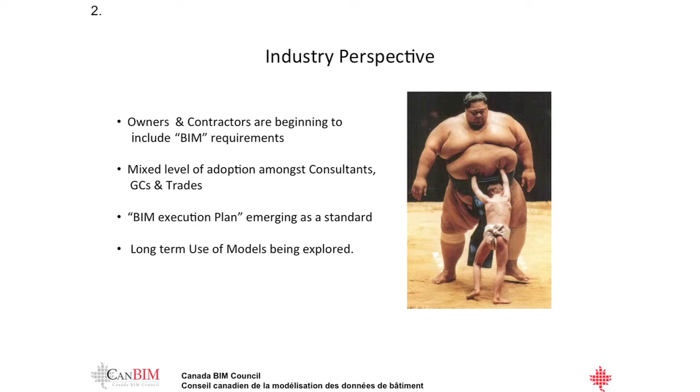We're finding that as our industry adopts it more, owners and contractors are beginning to include BIM requirements. But the reality is there's no cohesive standard around what it is. An owner can put in an RFP, you'll provide a BIM at the end of the project. Well, what is that? What does that mean? And so we're finding that as we go across the country and talking to various individuals and groups, there's starting to be a consistency in what's being asked for in terms of deliverables.

Clearly, the model itself, many will agree, has little to no residual value at the end of the job. It's very hard to integrate it into anything. So it's more around what are the deliverables at the end to allow, for example, facilities management. There's early adoption of COBie standards in the early going, and finding that as we move through, that information is maturing. So a lot of mechanical engineers, architects, and mechanical contractors and owners are gravitating more to that aspect.

BIM requirements, we're trying to help out as well. I know that myself and Bruce McCollum have actually, in Alberta, helped Alberta infrastructure write the right things into their RFPs around BIM deliverables. So that's something that, from an industry perspective, is still needed.

There is clearly mixed level of adoption amongst everybody. Some are using it simply to model. Others are using it to mine the data that's within the model itself. And we're finding as well that many are transitioning, providing the model in some form, whether it's exported out to another building information enabled piece of technology, or it's direct access to the model itself. At the end of the day, we're seeing this very much a tug and pull, push and pull process of BIM adoption.

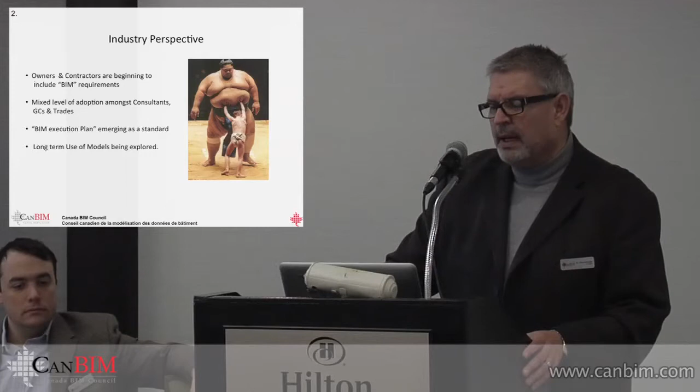Long-term use of models are being explored, but are certainly not maturing. We're not seeing anything right yet where the model has actually gone from its nascent design stage all the way through to a fully useful facilities management plug and play where you don't even need facilities management staff because the BIM is going to do all the ordering for the light parts and everything else.

That's getting there, but it's going along in pieces.

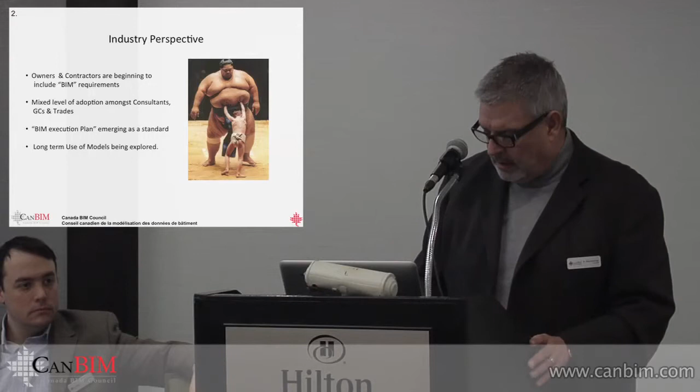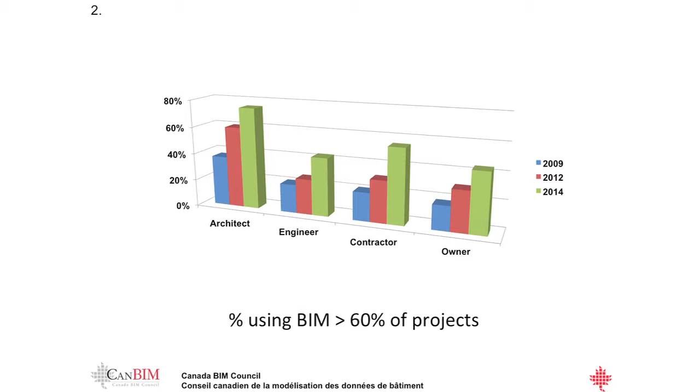We're seeing adoption certainly change now from where it was some years ago. As you can see here in this graph looking at 2009, 12, and 14, the McGraw-Hill review, and this pretty well matches what we're seeing in Canada. Percentage of BIM being used on over 60% of projects in offices, and that's a considerable amount of projects.

You can see how really where the greatest leap has occurred is within the contracting community. That has been a consistent trend where in more recent years, using it has become more and more common. Certainly we see the greatest use still resides within the architectural community, but that is somewhat disparate because it's to what degree is it being used? Is it simply to inform at a 3D level to perhaps a design development and then export out to AutoCAD?

So that is something that is being explored. But certainly we're seeing this trend here, and certainly CanBIM is wanting to ensure that we help each of these groups mature in this way.

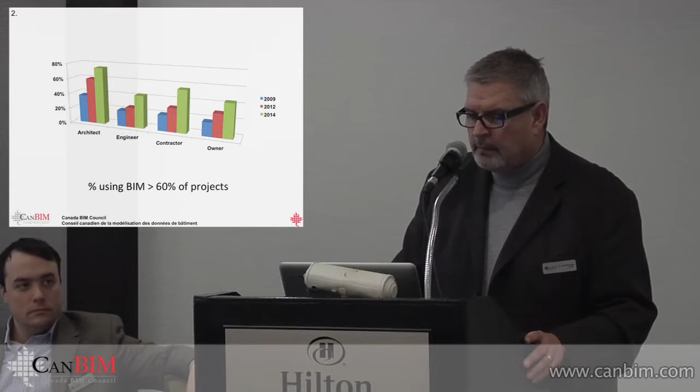So to talk about scope, in terms of emerging best practices, many of you will have seen the LOD 2013 specification that came out in September of last year, where it describes level of development. It's not level of detail. And sometimes the LOD, all these acronyms just get us so confused.

But basically, you can treat LOD, or level of development, as a conversation. What are you going to provide at what level? So there is no such thing, as we're finding with this best practice, as LOD for schematic design. Schematic design can contain information at various levels of development, whether it's 100, an Excel spreadsheet, all the way through to 350, where it's information around joint fabrication.

So those things are certainly coming along, and we're seeing more and more across the country the adoption of that standard as a means to create a conversation with everybody involved.

It is an excellent document to explore. One of the things I know the Designers Committee, in conjunction with some that they've talked with on the General Contractors Committee, is can we develop a joint level of development that could be used? We could append to an RFP, for example, to say, here, when you ask for BIM, here is what's going to be developed, and here's the expectation beyond the design into construction of what the contractor can expect.

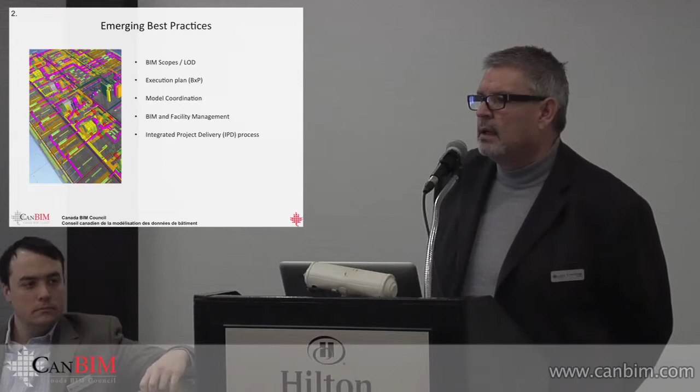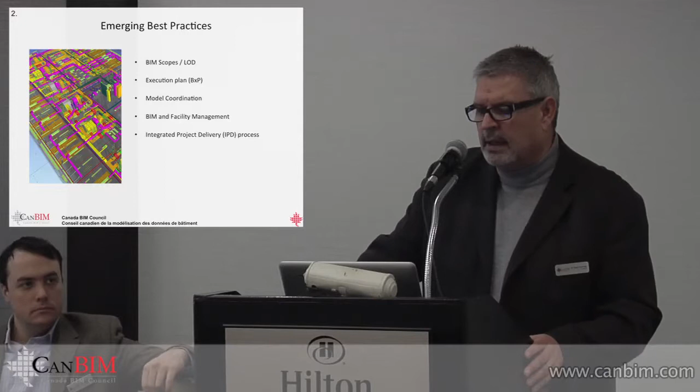I'm aware of 2 in Alberta that are private sector IPD. One that ourselves are involved in, and another group that is a private sector project in the $15 million range. So that's going to be interesting to see how we watch those as an emerging best practice to provide content. Paul Stocko is legal counsel for both of those IPDs. On our way out this morning, Paul and I were talking about providing a best practice, a white paper on what to do if you're doing a private sector IPD.

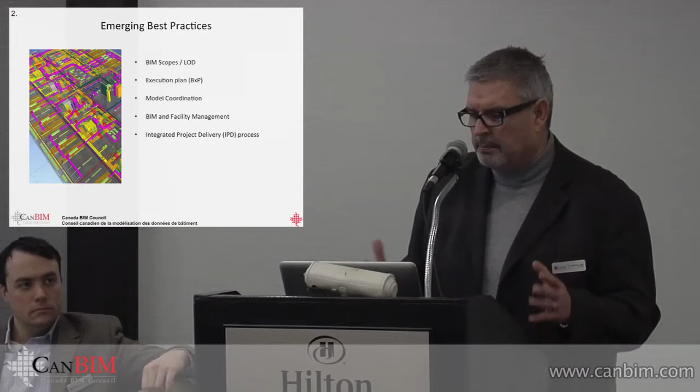So these are emerging best practices that we're looking very closely at. We continue to put a lot of emphasis into the AEC CanBIM protocol. This is a very important document to us, working with our counterparts in the UK, the AEC UK protocol, and a group out of Australia and New Zealand, the ANZRS group. We've been in communication with them as to how this can be developed.

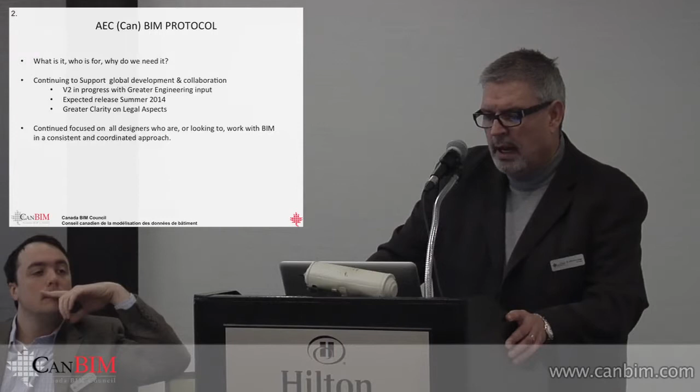And as of December, we connected in with a group out of Building Smart Alliance in the US, as to how we could mature this and perhaps look at it being presented for version 3 of NBIMS on a ballot. So some of the things include greater input from the engineers, a summer release this year, and greater clarity on legal aspects, with a continued focus on all designers looking to work with BIM in a consistent and coordinated approach.

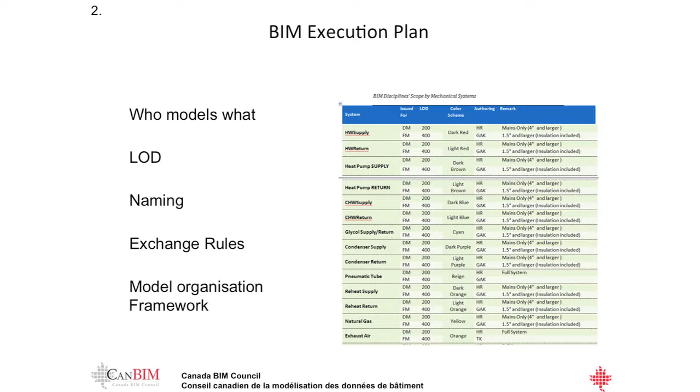As mentioned, BIM execution plans are going to be something to look closely at: who models what, level of development, naming, exchange rules, and model organization framework, such as is it a unified file, is it a federated file? And just to point out, this is a slide that Tom and I know we need to change, because it shows how rapidly this industry is changing.

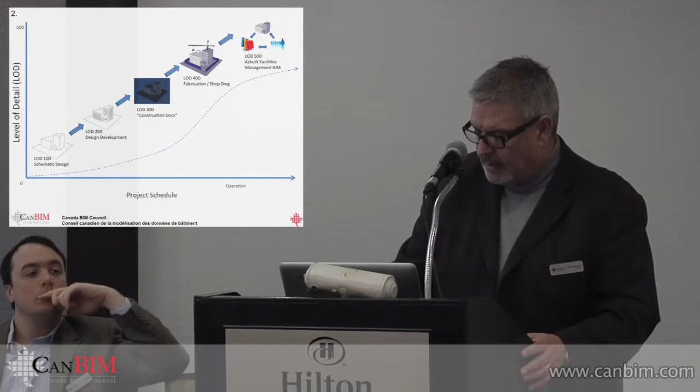Some time ago, level of development was considered around the deliverables we used to think of traditionally - schematic design, design development. Now level of development is evolving around what information is matured to provide to people who can make the right decisions at the right time in a process. So the complete upheaval taking place could have us starting fabrication before we've even finished the complete design. Level of development is now about maturity and what content is needed for that step in time. And integrated project delivery frameworks.

We're hoping that we can certainly share best practices around that. We'll look to the public sector projects going on and gather this in, so that you as new members can rely on this information as a pan-Canadian approach, not something lifted out of the pages of AIA. As everybody knows, it's a different world legally in the US than it is in Canada, so again we're making sure these mature to our level. And I think this still describes the process we see as best as it is at this time.

No longer, from a best practices point of view, can we think solely of ourselves as architects, engineers, and contractors. As designers, we are interwoven with all aspects of procurement, assembly, and operation. Decisions we're beginning to make around building information-enabled projects do inform the process downstream. We can no longer think in isolation or as silos. We have to think of design decisions as impacting all other aspects - assembly and construction impacting design, procurement, and operation. That's something BIM is really bringing to light for us.

In terms of model coordination, we're finding that more and more are using very simple tools. Yes, some are even using 2D content or very simply modeled 3D content to describe things. You don't need to have the ductwork with the rivets and the insulation and the hangers all neatly detailed. What you need to do is describe it at the level of development required to inform the process. But then we want to get to the site.

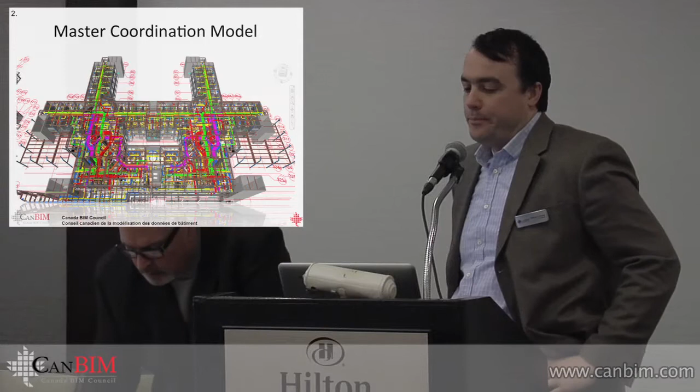Yeah, so I'm going to do a little overview of some of the technologies we're seeing emerging from our perspective. Like Allan mentioned, one of the key things we're doing as a company, and that we're seeing most general contractors in Canada do, is manage all the 3D information that flows on the project and maintain a master coordination model on the job site.

So similar to doing document control, now we're receiving 3D models as submissions. We're receiving 3D models from consultants that represent the design intent, and we're integrating those models together on a regular basis, then managing that process. As we receive the information, we bring it together, we integrate it, we review it, we look for issues, we manage those issues, and we push those issues back upstream to the detailers to resolve, and then they resubmit their work and we integrate it again.

Over the course of the project, we're managing this coordination model. It's made available on the job site to all the tradesmen and everyone involved with the project as a single source of, and the best source of, information on the project. Often we're getting to an extremely high level of detail 8 months before we're even at the point where we're constructing anything. This enables prefabrication, better decision making, and allows us to control cost. So there's big advantages, and we see this as one of the big trends on the job site.

One of the technologies we're using for this model was a Navisworks file. But there are many different modeling systems designed for integration, bringing all these different file formats and systems that the consultants and subtrades work in into the same model, so we can achieve that value.

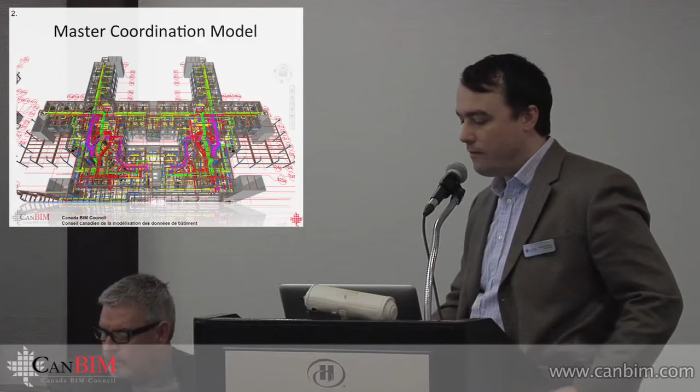The other trend we're seeing is clients, like Allan mentioned earlier, requesting or specifying a BIM model as a deliverable at the end of the project. We've seen this in RFPs as simple as a single line requirement saying provide a BIM model at the end of the project that is as-built and linked to all data. And then we also see 16-page documents that are very specific about the level of detail, the quality of that model, what's in it, and what the formats are.

So we're often responding to that, and this is one of the areas we think is still maturing - the software designed to use these models for facilities management, linking out and exporting data into Maximo and the CMMS systems out there. It's all sort of emerging, but it's emerging very quickly, and clients definitely want it.

We see probably a 5 to 10 year trend where it's going to be commonplace to have a common specification that says you're going to provide a model at the end of the project that we can plug and play into our facilities management system, with a common spec for that. So one of the things the council sees on the horizon is the need to develop that specification with all the other associations in Canada.

Allan, were you going to talk to this?

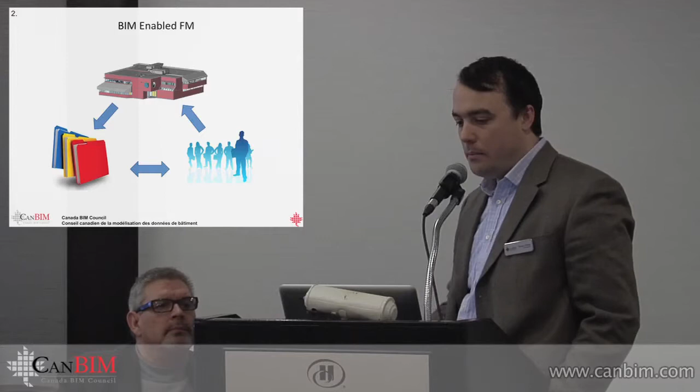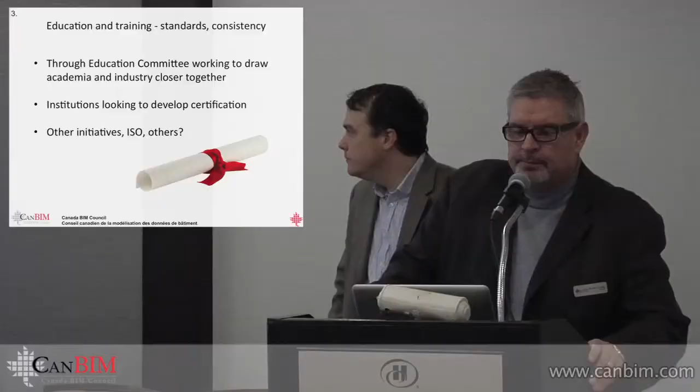In terms of education and training and consistent standards, we're doing a lot through our education committee, and Pietro's here from George Brown. We're looking to broaden this out, but I'd like to ask Pietro if he could give us a Coles Notes update on some of the initiatives he's looking at from CanBIM's perspective to draw academia and industry together across Canada.

Thank you, Allan. The main thing we're looking at is we've found that across Canada, every institution is teaching BIM. But when you go in depth, you see they might just be teaching a Revit course or something very limited in nature when you think about the process of BIM.

So our main intention, after doing an environmental survey, is to establish accreditation through CanBIM. Our main goal is not so much to go out and evaluate the countless courses that seem to exist, but to set a standard of outcomes and objectives, and have institutions come to us and say, this is what we're offering. If it meets our established outcomes, we will begin to issue accreditation on various levels, from a very basic level to a full, perhaps level 3 or 4.

We're in the process of finalizing those levels - something will be forthcoming shortly. Really, we're tying everything together so that CanBIM accreditation can be a point of reference and a benchmark for anybody looking to hire or work within an environment of BIM in Canada. So when you see the CanBIM accreditation, you'll know that we've evaluated the outcomes of those particular institutions or courses, and determined, based on what our members are telling us and what we think is important, that they are meeting the outcomes of certain levels.

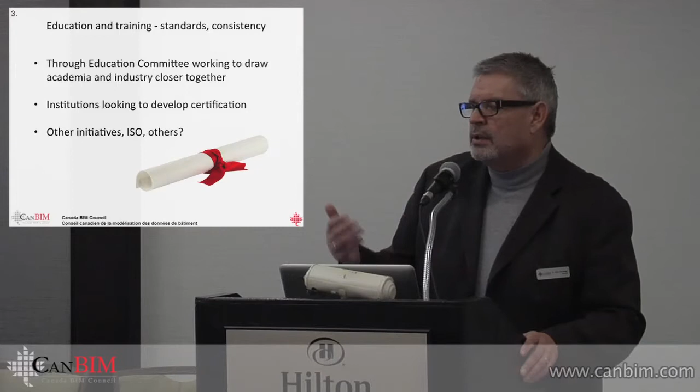Don't get hung up on the US acronym. It is surprisingly, given our neighbors to the south, not US-centric. It simply originates in Building Smart Alliance. It is a standard of standards, and it is easily adoptable. There is nothing to say with NBIMs that you cannot achieve everything. It's like LEED, you cannot get every LEED point. You cannot do every piece of NBIMs when you're on a project. There are pieces within NBIMs, such as spatial validation, which could be used on any project. So think of it as a standard of standards, and that's what it's working towards.

Another aspect in terms of looking at best practices and emerging trends is around software development. How is this evolving? Tom?

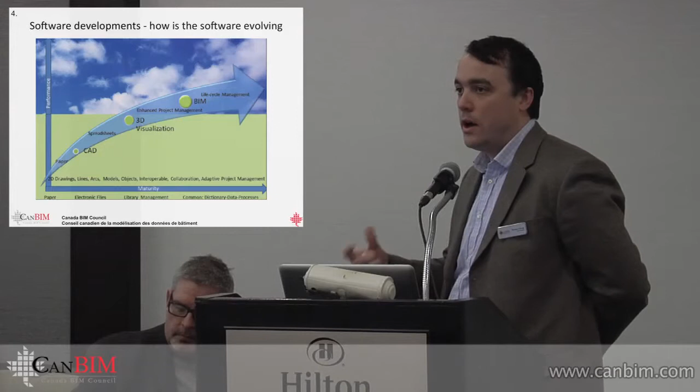Just a real overview slide that shows the evolution of how technology has been applied to construction and architecture engineering. Obviously we started with CAD, that's moving into other systems. 3D visualization was introduced, and now building information modeling. One of the emerging things is the integration between building information modeling systems and computerized maintenance management systems, and other systems designed for the long-term use and maintenance of facilities.

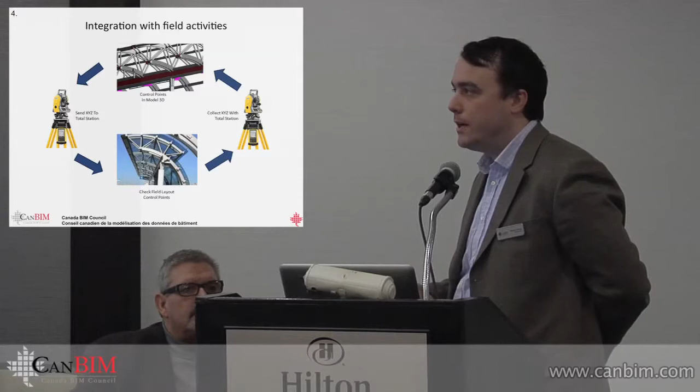We also see integration between project management tools. Almost every major project management tool is developing a BIM integration tool that will manage the process of collecting all these 3D files from different sources and integrating them together. That's another big trend. And then obviously the concept of being able to bridge this model to the field and actually build what you've modeled and planned out is extremely important.

The surveying equipment that is being developed and that you can buy today is closely integrated with building information modeling. You can go into the model, extract XYZ points, import those points into your surveying instrument, go out to the field and lay out those points, and vice versa, collect information from the field and bring it back to the model.

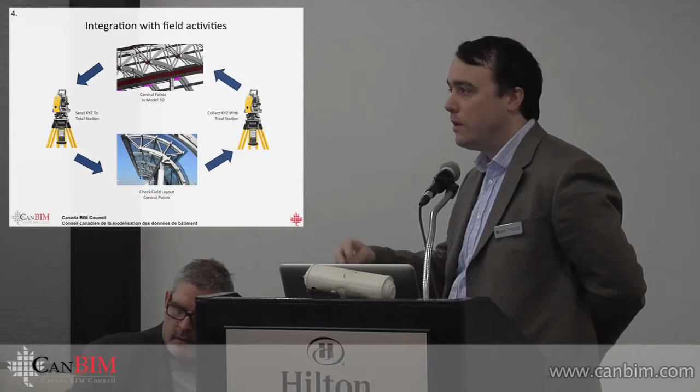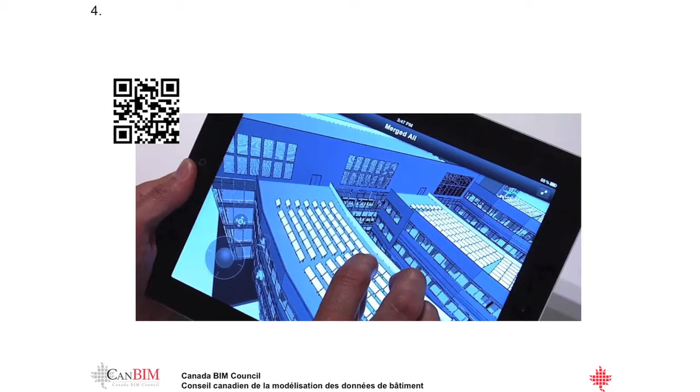We're also seeing other technologies, and there's a big push from Autodesk and most major software vendors to push into mobile computing, allowing anyone involved with the project to go to the field, access the 3D information, maybe via an RFID tag or barcode system, and be able to access the 3D model where they are in the building. These softwares are maturing very quickly, and we see this will be a major trend both through construction and into facilities management.

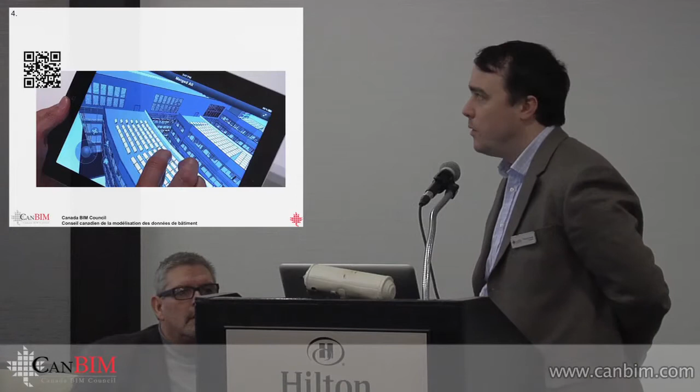There are quite a few different softwares emerging. Autodesk has the 360 Glue, I believe it's called, and we're kind of toying with that. I know other major GCs in the country are starting to look at those tools as well. One of the other... I don't know if I had that backwards. There's the same sort of concept.

These tools are getting cheaper, faster, and easier to use. Infrared scanning technology is also becoming very cheap and accessible. In a couple of years, you'll have this kind of technology on your cell phone where you can take a three-dimensional photograph and link that back to your BIM model, recording the actual field condition and 3D geometry, which will be extremely useful for bridging the theoretical planning system to the actual site environment.

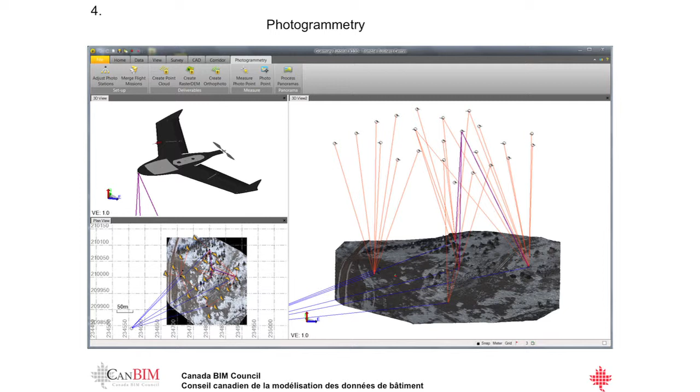All these technologies are emerging very quickly. We see them coming down in price. Most of the companies managing big work are starting to dig into these technologies and tie them back into the way we work. Just an example of how drone technology is evolving—it's something my company is interested in, because we're managing some very large, sprawling work now.

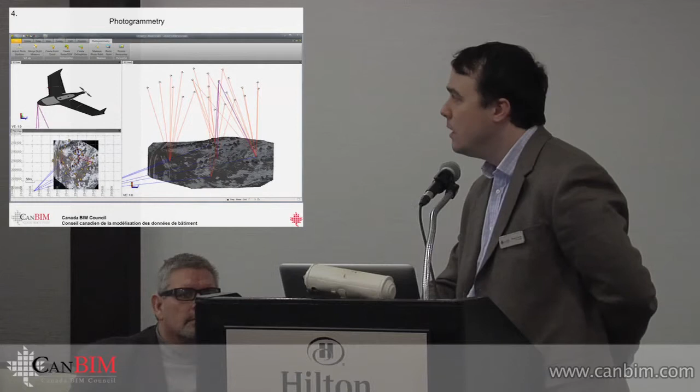Since we're talking about technology, is there any technology out there that does the reverse—that you can actually make a hologram in space of the model, as opposed to taking photographs?

Well, the nearest thing I could think of would be 3D printing in concept, where you could take your 3D model and print it out physically. I haven't seen any holographic type systems yet, but total stations are pretty phenomenal now—you can go into your model, collect the points, go to the field with your total station, and it lays out the points. So in a way, it's similar to that.

Just one note: they are actually doing this in Europe. I have seen programs where they are projecting, but you're looking through the screen, so you can see virtual reality and augmented reality. Yeah, that's like Google Glass, and even the Autodesk tablet application—you can navigate in the field and actually see what the condition is using that.

And I think IKEA now has their catalog where you can put it on the floor and use your iPad to look at the furniture. Should have that in there.

There's one company I know of, Zebra Imaging, that has a holographic medium you can move around—a printed-out medium, but with a light source on it you can see your BIM model, and as you move around it changes perspective like a photograph, changing depth. You can actually change phases and see different phases of that project within a printed-out medium.

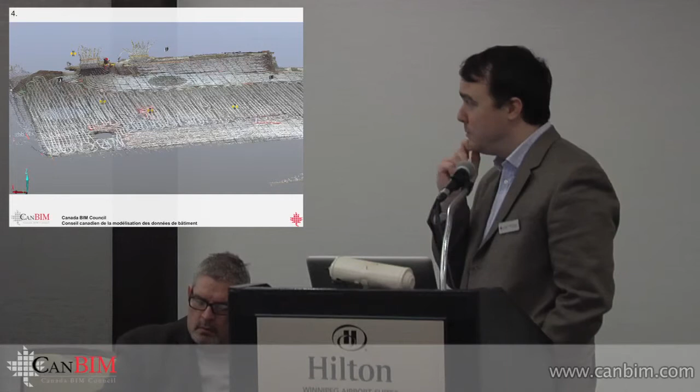It's a very fast-paced evolution of how all these tools work together to translate information. This is actually a video, maybe it'll play for us. Just a quick example—nah, it's not going to work, is it? It's going to go super slow. But in concept, that's a 3D scan. On my computer it runs fantastic, on Jerry's it doesn't run at all. But maybe I'll show you that later if you're interested, just let me know.

So obviously 3D scanning is excellent for as-builting—in-floor heating, for example. This is actually the Calgary Airport project. We've got acres and acres of in-floor heating. The traditional way of as-builting in-floor heating was laying tape measures on the ground off of grid lines, taking photographs, and logging those photographs somewhere, which is nearly useless if you're trying to drill holes 10 years from now.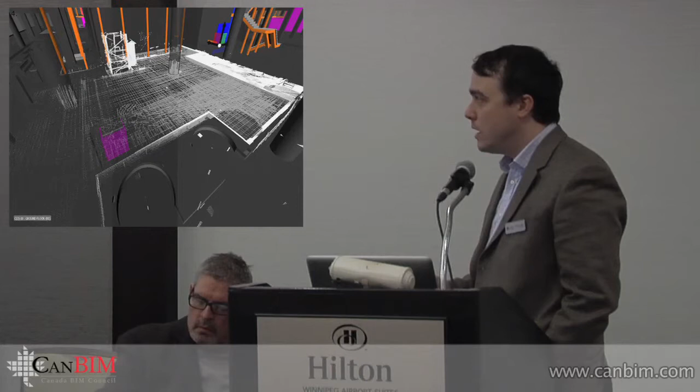But the 3D scan is plus or minus 2 millimeters. You can drop that into CAD or into BIM, and you have that as-built condition. The point cloud file type is reasonably future-proof—it's just XYZ points, so we see that being useful information into the future. Same sort of concept with in-slab conduit.

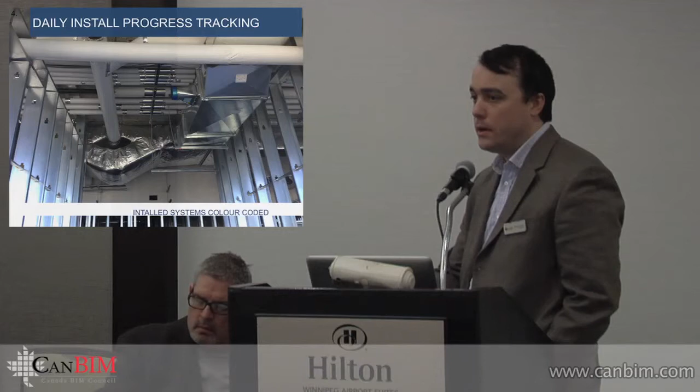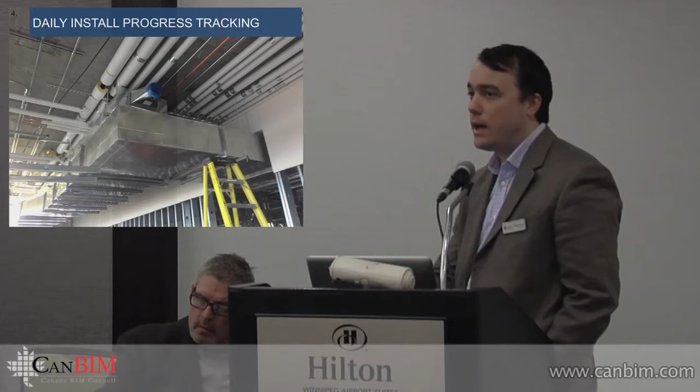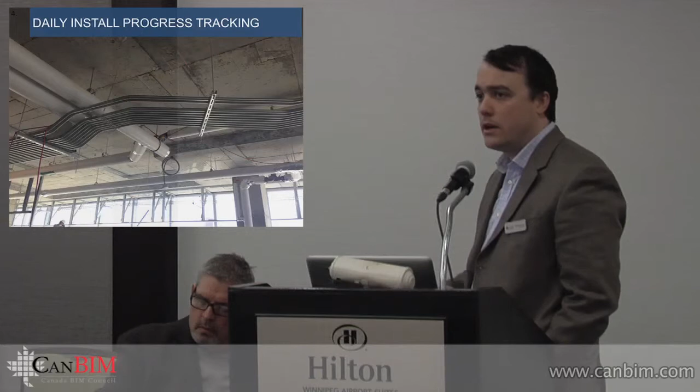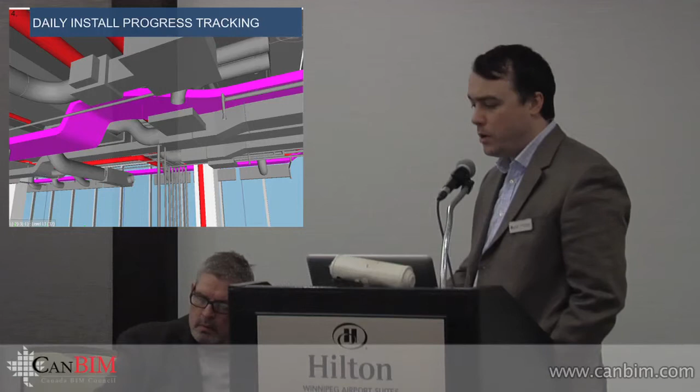One of the other trends we see is that because the models are so accurate to what's being constructed, you can actually utilize those models to track daily installation progress. If you extrapolate the technology available today, I think 10 years from now you're going to have RFID tags on every single element delivered to the job site, and a 3D model that updates itself based on progress in the field. It'll make it a lot easier for everyone to understand earned value and progress in the field, and as a planning tool.

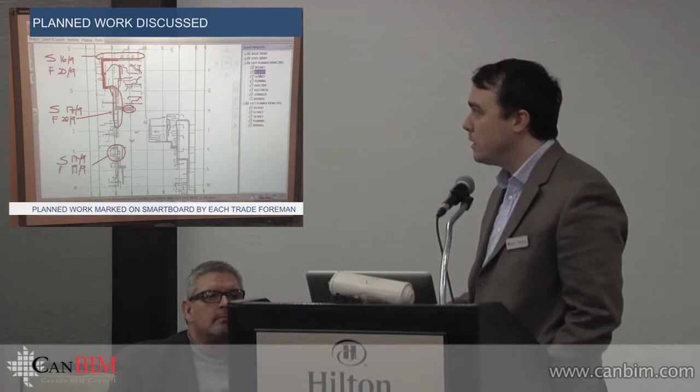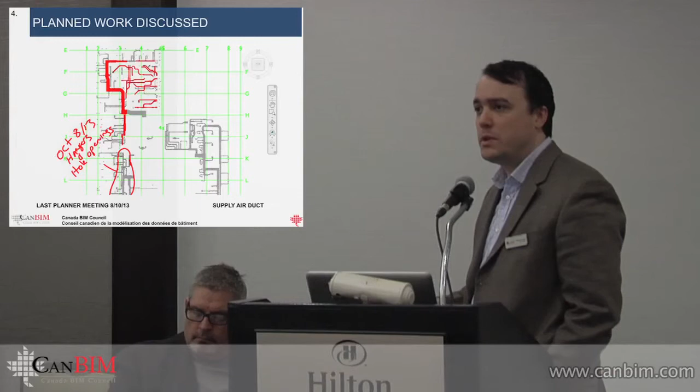Of course, all this technology is now being driven down into the job site trailers. The tradesmen all have Navisworks or similar systems on their machines, or access to the consolidated and integrated model for their own purposes in planning and executing the work. The last planner system, an aspect of lean construction, is being used pretty regularly now, especially in Toronto. We're seeing technology like smart boards and other interactive tools made available by general contractors, facilitating this coordination process in the field.

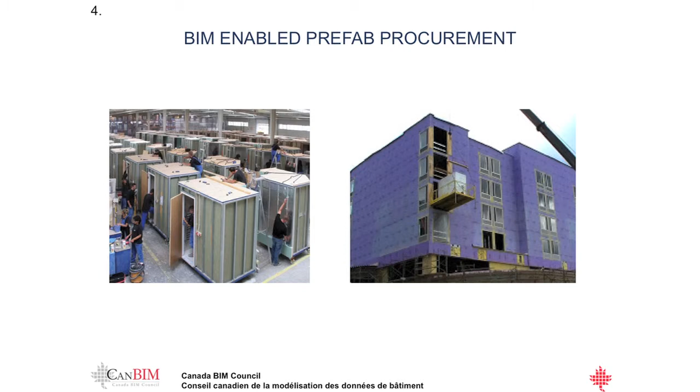The other big trend we see in construction is prefabrication. This isn't a new concept, but we're seeing all the major general contractors take steps to initiate it on projects, and owners demanding it. We're seeing washroom pods and other repeatable aspects of construction, and vendors popping up offering that, where you can order 100 washrooms at once and have them arrive on your job site.

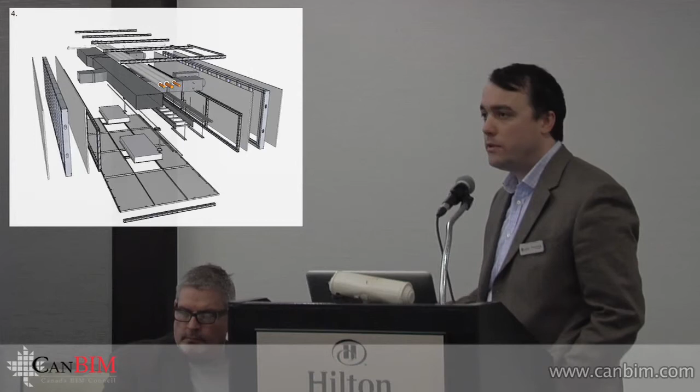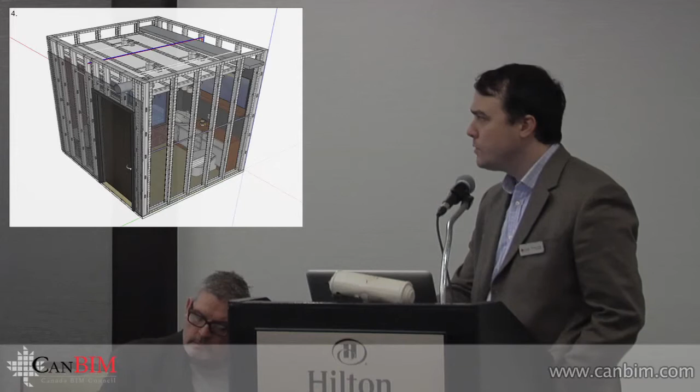The main value of that is schedule, not necessarily cost. But whatever you can build off-site, you can do in an enclosed, weatherproof environment with better control over quality. It helps use labor more efficiently and improves productivity. We see this as a long-term trend where entire buildings will be prefabricated as a matter of course, probably 10 to 15 years from now, and stick-built construction will become a thing of the past. In concept, that can be applied to multidisciplined corridor units.

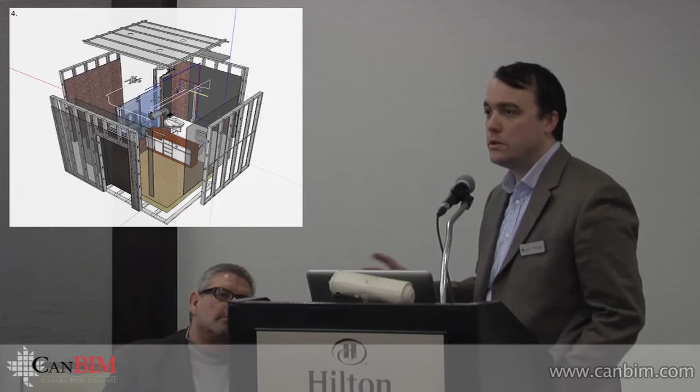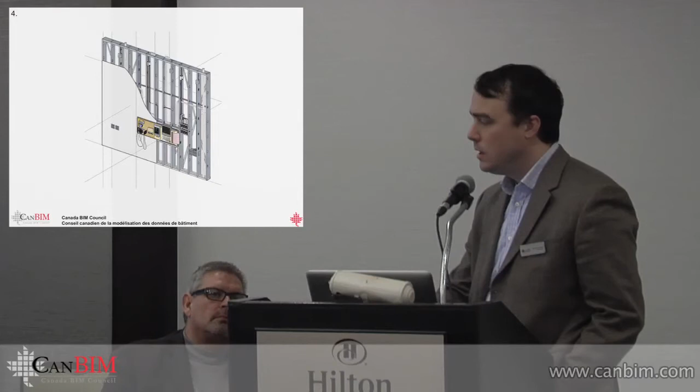In a hospital environment, you've got a lot of systems congested above a corridor. Using building information modeling to coordinate all those systems, you can then slice the total hallway into manageable pieces and build those off-site. That's a trend we see, along with washroom pods, and the same approach applied to other complicated aspects of projects, such as head walls in hospitals. These things can be done much more efficiently in a factory-type environment when you create repeatability in the design.

But to achieve any of this, you need a very integrated process between the designers, the subcontractors, and the general contractor to develop this level of value. Traditional lump sum contracting doesn't give you the opportunity to look for innovative approaches to construction like this.

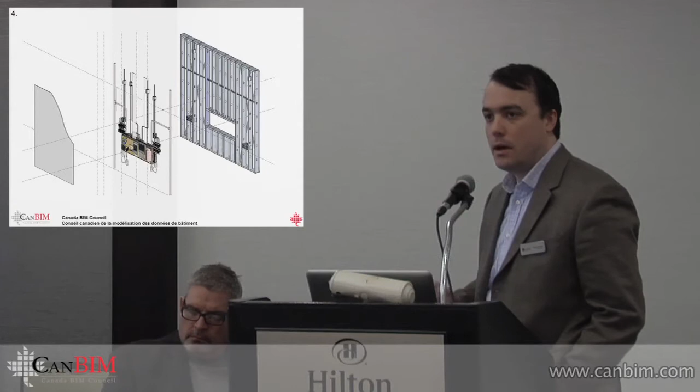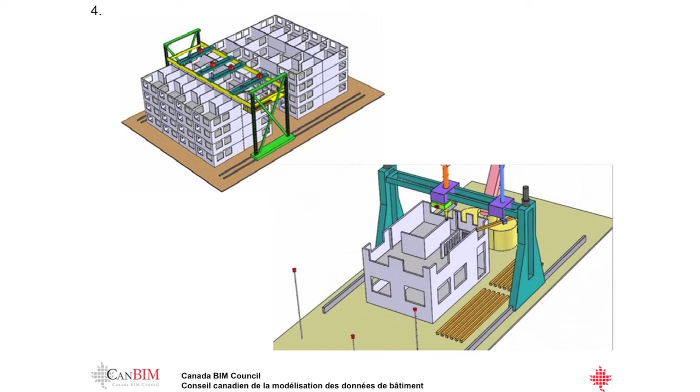Just my last slide here in concept. This idea of 3D printing on a mass scale is also a trend we see. Who knows how long it will take to come to market, but the concept is you set up temporary rigs around your site and actually print out the concrete structure rather than form it out. When this starts to happen, we're going to see big gains in efficiency, be able to do more complex things with a lot less labor, and it'll be a bit of a game changer for the industry.

But to enable all these technologies, you need to know what you're going to build. The industry has always been very reactive, and we're very good at reacting to problems and solving them quickly. Now we need to push all that knowledge up front, become knowledge workers, develop finite plans, and then execute those plans without any issues.